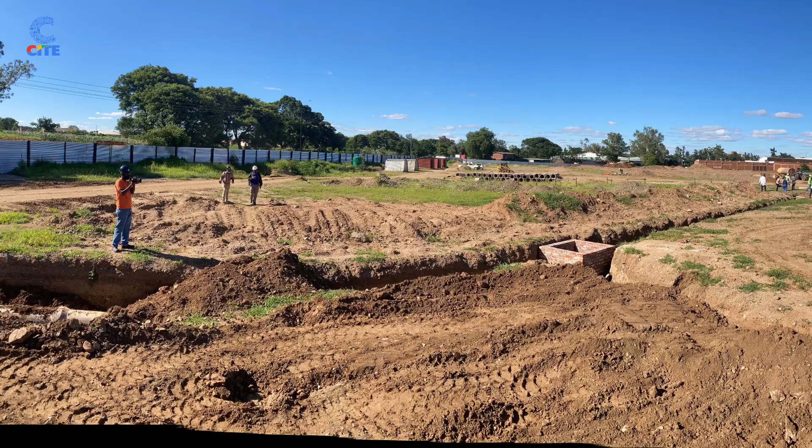Today we are here, this afternoon, ladies and gentlemen, to hear from the developer what is going on, and if ever you have got any questions that you need to ask, please do so. There is no bad question for as long as that question is necessary for the development of eGodini, and for as long as that question is in the interest of Bulawayo.

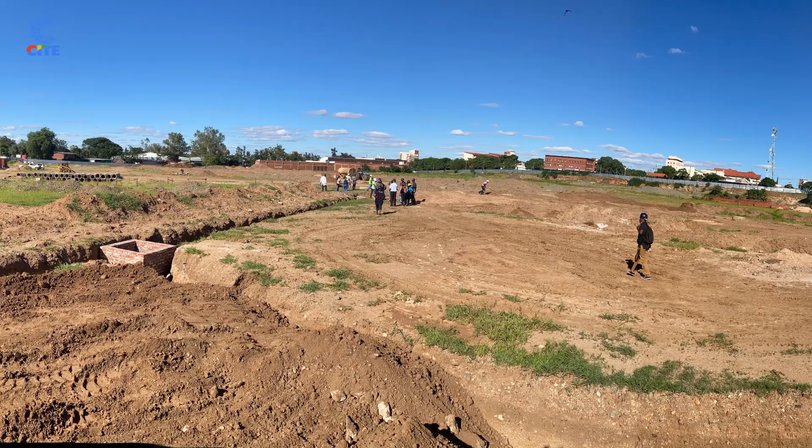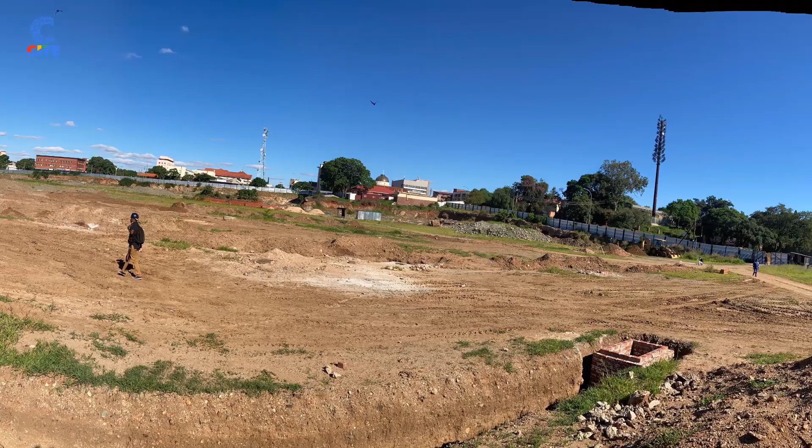Ladies and gentlemen, I want to say we have had some meetings, management and this morning council, to discuss the issue of eGodini. We could not invite all the major stakeholders for this meeting because it was going to be impossible. But with your invitation as media houses, it's just like we're inviting virtually everybody, because we are going to be able to tell a story.

Let's sit down now, listen to the presentation by the developer, and we'll have a plenary session and a talk, after which we expect you to project exactly what is happening on the ground. I thank you. Thank you very much for coming to the briefing session.

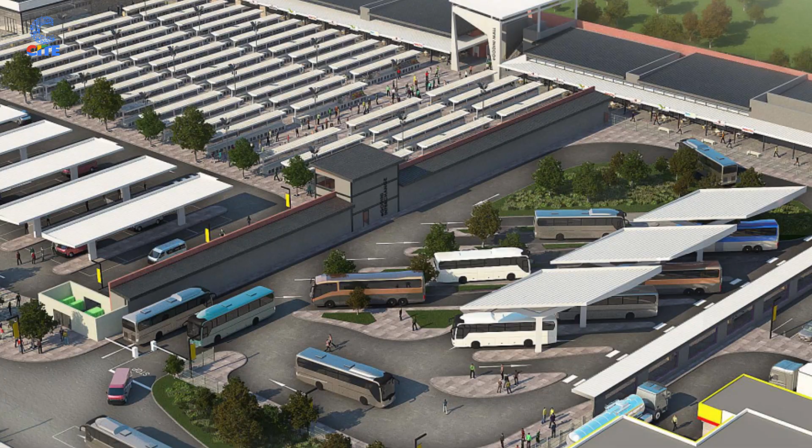What we will be doing today is giving you an update of the project. The way we are going to do it is, instead of it being just a briefing session, we're going to try to go into each section and give you a little bit of detail around that. Hopefully we won't take too long, but I think it's important to make sure that we are able to engage on that basis. So I will start just to give us all a quick recap on the project and what we are actually talking about.

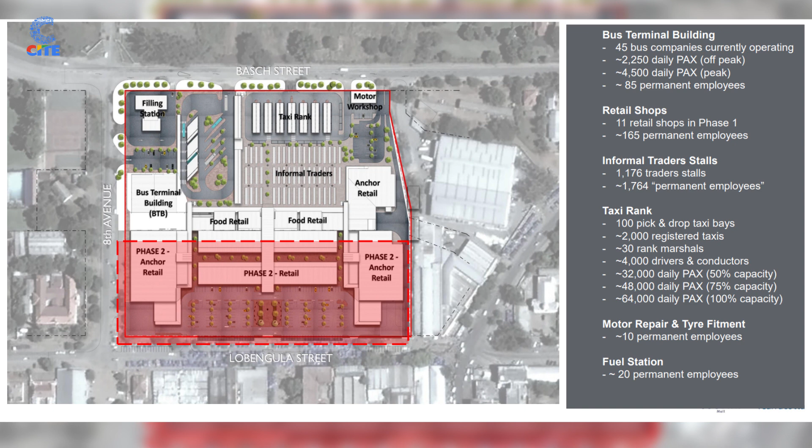If you recall, our development has got different phases, starting from phase 1, which is split into 2 phases, but we will deal with that. And then there is phase 2. So in phase 1, we've got a taxi rank, informal traders, a bus terminal building and its platform, fast food retail, and anchor retail. That is phase 1. Why is that phase 1?

It's phase 1 because it's informed by the market research that indicated that this is what will kickstart the project: start with these facilities, and then as time goes on, you add other facilities. Like with any development, it's a natural progression of a development cycle where you start at a certain point and you add as the environment grows.

If we talk about phase 1, we're still recapping here before we get into the meat, I indicated that there's a 1A and a 1B. Hopefully everyone at the back can see that. And then you will have your phase 2. So in your phase 1A, which is what we are here to discuss today, we've got informal traders, 1,176 stalls. We've got a taxi rank, a Zupco rank, motor retail, and ablutions. So that is the section that is phase 1A.

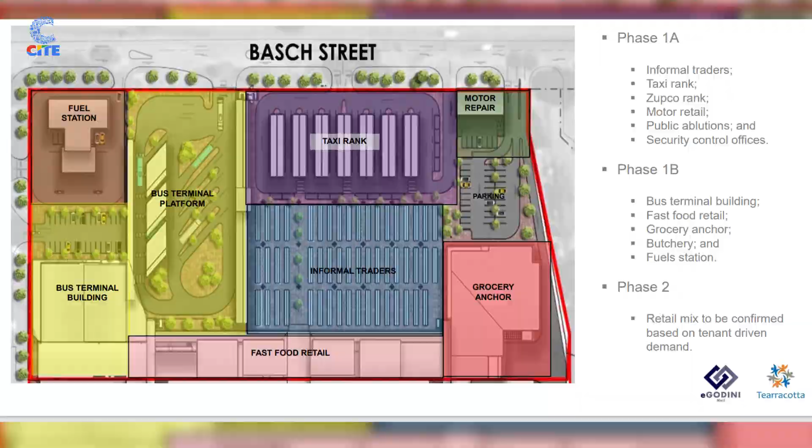So you will also see on site, the focus has really been on preparing to get us to be able to do the phase 1A area. This is phase 1, including 1B. In 1B, you will see the bus terminal building, which is over there, the fast food retail, which is over here, and then the grocery anchor, which is over there. So that is phase 1 in totality. Phase 1A will be the taxi rank, the informal traders, the platforms, and the ablutions and the offices here.

So how we're going to do it is that when we complete phase 1A, we then move our hoarding backwards to this section so that we can then work on phase 1B. Now also, we just want to be able to contextualize issues, this time in terms of the different stages of a development project. It's very important that we put it this way so that we can follow and understand better as we unpack the different areas.

So typically we will have 5 stages, 1 to 5: planning and approvals, what we call here the enabling works, then the civil works, then the top structures, so that's the brickwork, and then the commissioning. In your planning and approvals, your typical issues are your geotech, your topographical, your EIAs, and all your architectural and engineering designs and plans.

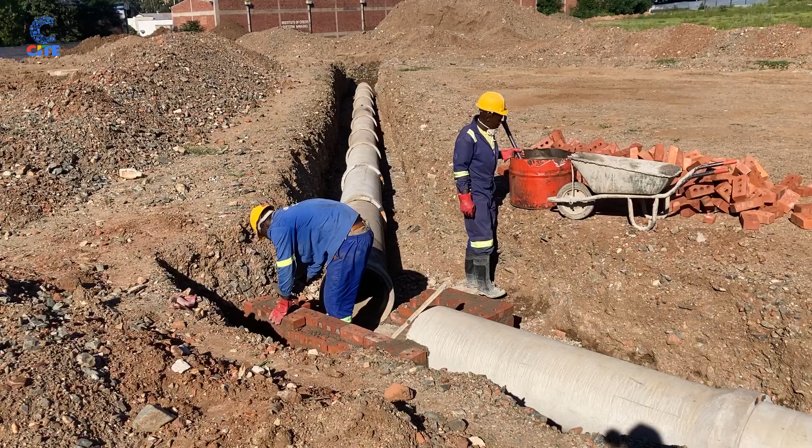And then top structures, that is the brick now coming out of the ground. That is what all our people are crying for, to say, when is the brick coming out of the ground? Because all these other things you are doing, we see it, it's fine, but when is the brick coming out of the ground? So that is what we will also look at in terms of phase 1A of the project that we are dealing with. Timing, where are we, what's actually happening. Then there's commissioning.

I think these phones are disturbing my...

There's commissioning there, number 5, and then that's where it is. Now, if you look at this column here in terms of weighting, it says there the weighting of each of these stages. The weighting varies depending on the specifics of the project. Like I said, if we are going to Rose Camp and we have to build a taxi rank at Rose Camp, it's already flat, we can get into it.

It's easy. But now let's talk about eGodini, phase 1A, the weightings, what was actually happening. For our phase 1A, planning is 10%, that's normal for most projects. Enabling works, because eGodini was not easy to do a development on, we had to do a lot of enabling works. You will see that as we take you through the presentation. What was actually done? What is the context and the extent of that? That you will then see. That comprises approximately 35% of phase 1A.

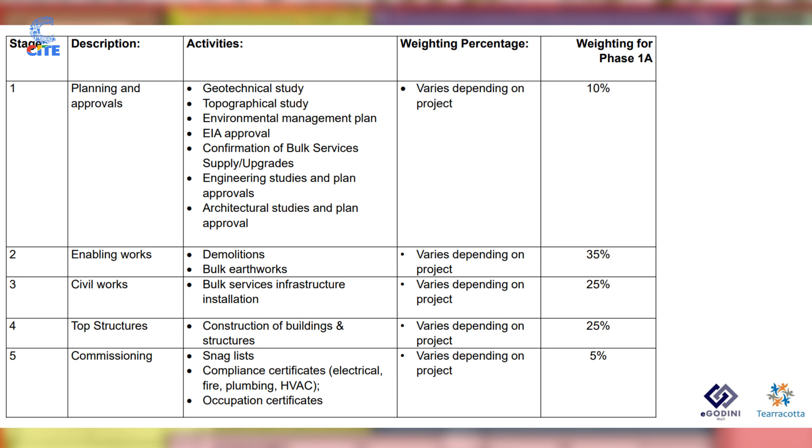When it comes to top structures, for us the taxi rank, the bus rank, the informal trader stores are simple, good structures, and because of that their weighting is about 25% of the project. Then commissioning is the last thing. In our project it is about 5%.

That deals with things like your compliance certificates, your electrical, fire, plumbing, and then eventually, once you have all your compliance certificates in the file, council can then issue an occupation certificate, which means that it is safe now for human beings to go and operate and use those facilities. So these are the stages.

So moving forward now, when we talk about what we have been doing on site, we're going to be talking about it in the context of these stages and the weighting of these stages in relation to phase 1A of the project. So if we start with phase 1A planning and approvals, the first item there, number 1, planning and approvals, we'll go through the descriptions and then we'll look at the status there. So planning and approvals, very simple exercise.

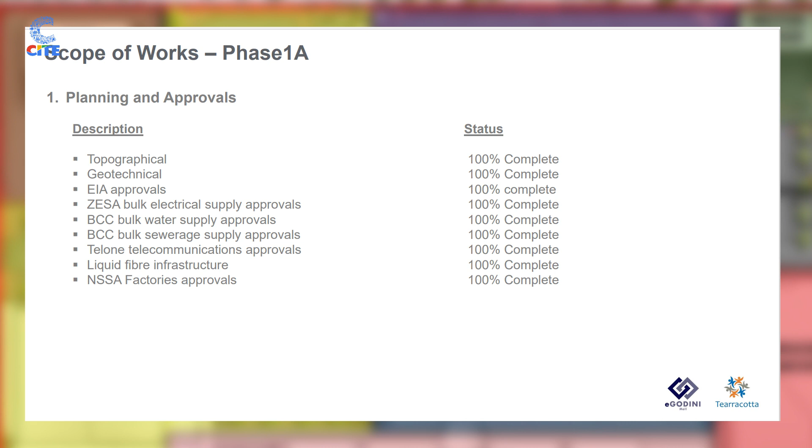Our topographical studies, our geotechnical studies, our EIA approvals, bulk electrical supply, bulk water supply, sewer, telecommunication and NSSA factories are very simple, straightforward. You prepare your documentation. We use a qualified, registered professional team, architects, engineers, all those different professionals. They did that, they submitted, got their approvals there. Those planning and approvals, let's look at the timelines there. It's important to have the timelines.

So we start with the first line item there. Council announces site handover to Terracotta. That was done in January 2018. After council announced that site handover, some of the stakeholders who were physically occupying the site, the informal traders and their taxi associations, indicated that they would like to have a meeting with council so that, from their perspective, they make sure that if they are being removed from eGodini, when eGodini is completed, it is them who will be returned to eGodini. It will not be a different group of people. So yes, this is what the stakeholders required.

There were also residents associations in those sessions. Another issue for residents associations, and for taxi and informal traders as well, was to say the work that is happening in eGodini, can it benefit residents of Bulawayo? The employment, can it benefit residents of Bulawayo? The companies that are working there, ideally, can those be companies that are based in Bulawayo, so that those companies employ people of Bulawayo? So that was another issue that the Residents Association, the Taxi Association and the Informal Trade Association raised. Okay, we engaged and then we agreed on that.

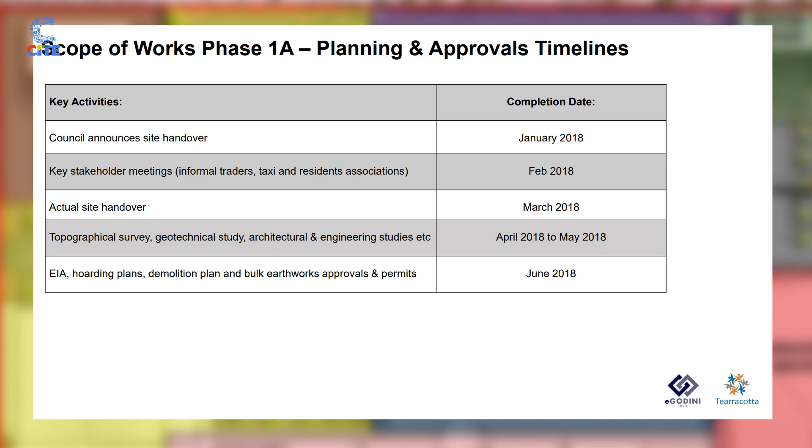In March 2018, as soon as we got site handover, our professional team, architects, engineers, the guys who were doing designs for the redevelopment, there were certain designs they could do before physically accessing the site. But to finish those designs, they had to physically access the site, and they were only able to do that in March 2018, because there were people occupying it. So they accessed the site, and then from April until May 2018, they finished all their designs, drawings, studies, reports, everything in order for us to submit and get approvals. Once that happened, we quickly did the relevant approvals for EIA, the demolition, bulk earthwork approval and permits. We did that in June 2018, and we got those permissions.

Now, who were these people who then were involved in planning and approvals? Because remember, we've said the resident association, they all said we want local companies, local people to be working. We said, okay, we've renovated the contact center as Terracotta, let's try to support what the stakeholders have told us.

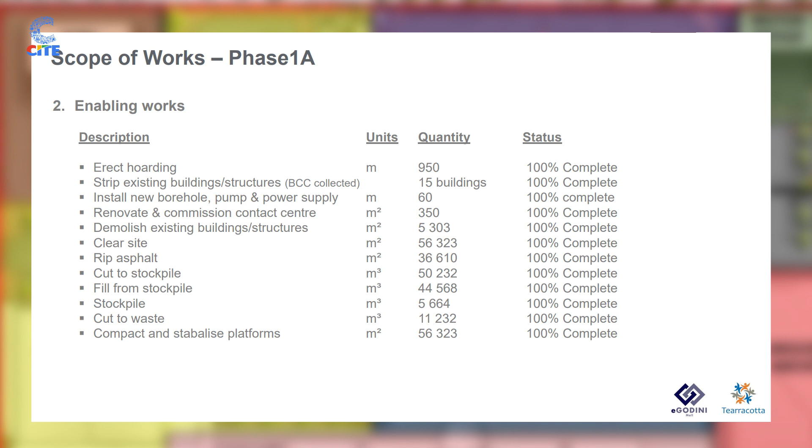And then from there, we have the contact center, which is this building here, 350 squares. Like I said to you, we renovated that, that's complete. And then we had to get in there and start doing the work. So the first thing we did, we demolished those existing buildings, about 5,000 square meters, that is complete. We had to clear the site. There were trees, there were top layers of the black cotton soils that we had to remove. You can't use that on a site, so those have to be dumped somewhere. So those go to Pelandaba, the municipal dumping sites, and that was used to fill.

So City Council will tell us, this soil, go and fill those borrow pits that have been left in different areas, because those are dangerous to animals roaming around, and even small children, when they go playing, they can fall into those things. So council would tell us, go and fill that hole, go and fill that hole. And that's what we would do there.

And then from there, we cleared the site. That's 56,000 square meters. We had to rip the old tar that was there, which was not in good condition, of no use anyway. That was another 36,000 square meters. And then we started now doing the big enabling works. So there was a mountain all on this side. And that mountain, if you stand where we are standing right here, if you go along Lobengula Street, I think that's probably about 200 and something meters.

If you go along down that way, then you will see that the mountain was all the way up to there. But today you see the mountain is gone from there going forward. So we had to cut that whole mountain, and then we had to go and fill eGodini so that we can have the platform. So we cut to stockpile 50,000 cubic meters. We filled from stockpile 44,000 cubic meters, and then we've got a small stockpile left, 5,600 cubic meters of certain material that we wanted to keep.

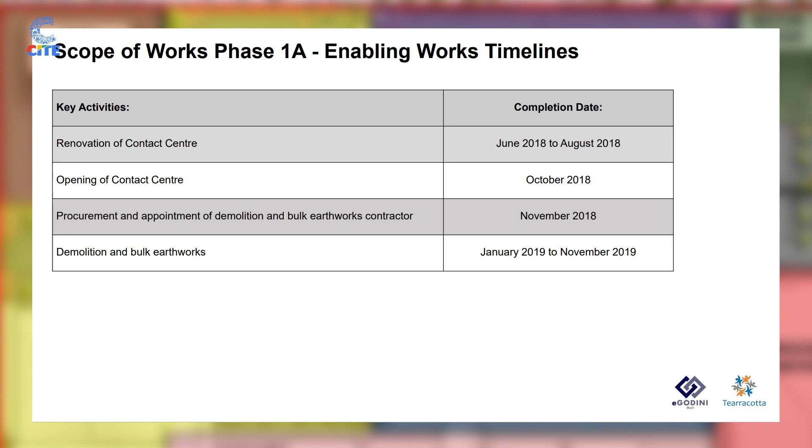What are these enabling works? Because also, what happened is that we see comments on social media where some people say no work has ever been done at eGodini. So we are saying, remember, when you talk about a development project, there are different stages. There's stage 1 to 5. So stage 1 was done. Now here's stage 2, enabling works.

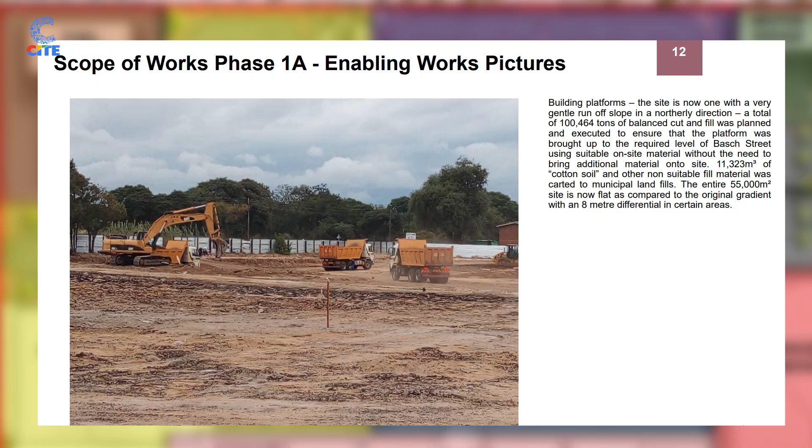And this is the civil contractor on site at the time. I'm always proud to show this picture because you'll see there's an excavator there, 330D Caterpillar, huge excavator. That is a mining machine. Normal construction machines would not be able to do the work that we did here during the time frame. They would still be doing civil works right now.

But because we're using Jared Goddard, because they do contract mining, they have the right size and the right type of equipment, and they have the technical expertise of handling huge tonnages of material. Remember I said it was 50,000 cubic meters of material that they were actually handling. I would just like to play something for you so that you can see during enabling works what was actually happening, the type of equipment that we were actually using.

And I always say, there's my excavator there, the large excavator. I always say to the town clerk, any day, if in any way in Bulawayo this excavator should work, please call me so I can come and take a picture, because I want to see a project in Bulawayo with that type. So it's one of the jokes that we sometimes have, but this is the type of equipment that we needed in order to do this type of work.

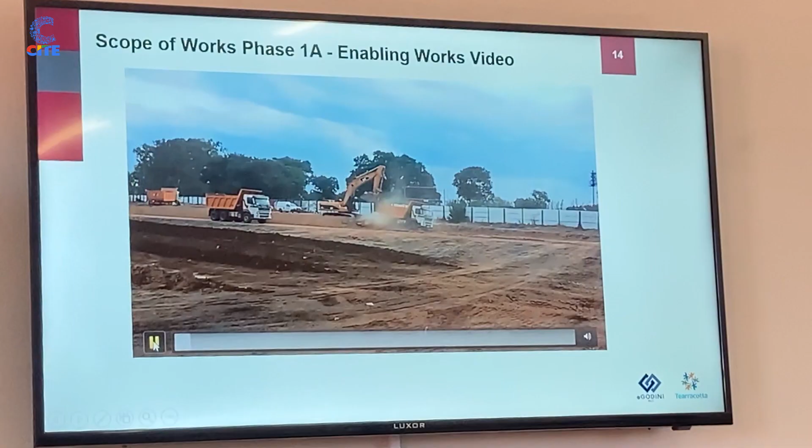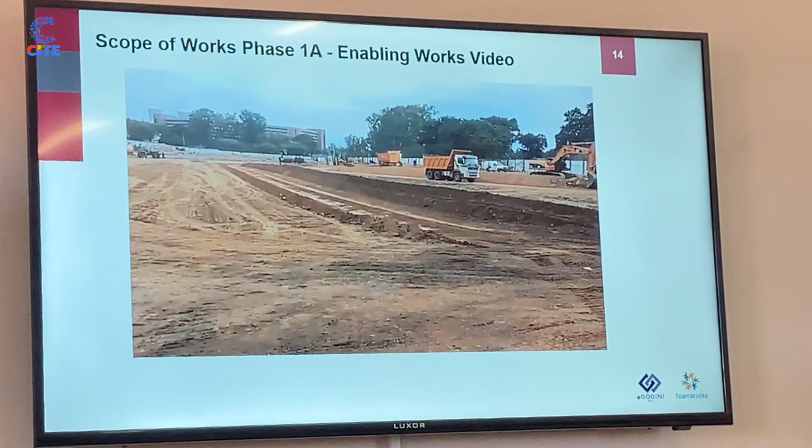Trucks. There we are. Loading 3 trucks at a time. Grader is mixing in situ material with new material on top. This is where we're dumping to fill in. It looks like we have got sufficient material on site to do all the infill, and that we will need to bring nothing on site. But the loader over there is also loading trucks, 2 trucks.

Now, when we talk about enabling works, you know, there's a beautiful joke that goes around where people say, these guys at eGodini, they are moving sand from left, they put it right. Then they take it from right, they put it in the corner. Then they take from the corner, they put it over there. What we are doing when we are doing that, we are actually doing civil engineering.

And it's very, very important because we've disturbed the entire ground here. We do not want to build things on top, the ground shifts, and then you have things that start to crack. So it's very important that we build the platforms correctly, we compact those platforms correctly, we allow those platforms to rest and to settle and to shift down correctly so that we can get the same compaction in the platforms that we build as what Mother Nature gives naturally in platforms that have been developed over billions of years, so you can just come and build a building on top.

It's a normal process. It's just time consuming. Yes, when you just look at it, it looks like Labantu, they're just pushing sand all over the place. But it's actual real work, it's real engineering work that is being done. And you can see it there, being explained on that video.

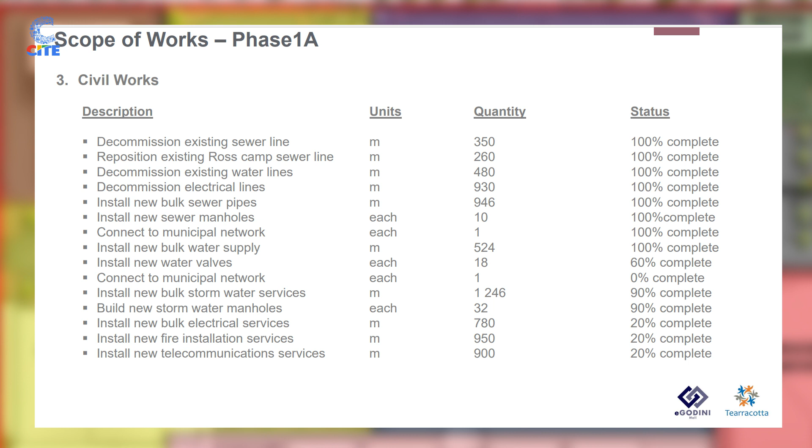We connected that sewer to the municipal line. We will show you a municipal line where we connected the sewer. It's flowing, the sewer that's coming from Ross camp, Ntlandlela. We've diverted, we've connected that. We had to install new bulk water supply, 524 meters. Install new water valves. Here they are, 18.

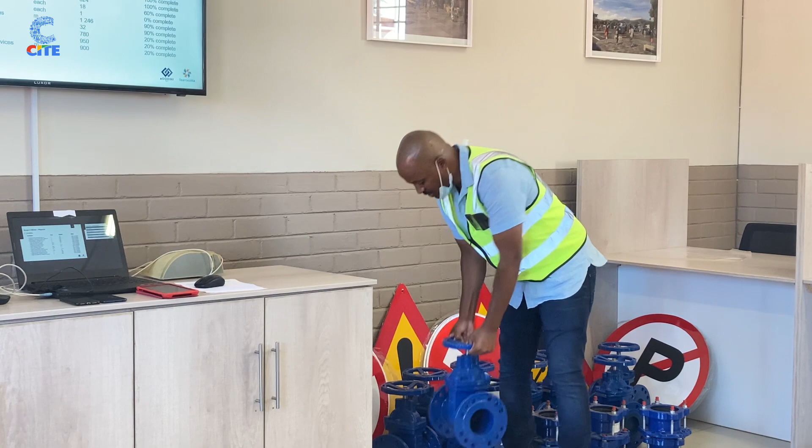We always joke with these ones here for phase 1B. We always joke with some of our council colleagues in the technical team to say, guys, can you see we are using the real stuff here? So just go and look at your own installation, because we want to put proper equipment for water inspection within eGodini. So we are trying to do this thing to the real standards. We're not doing something which is substandard.

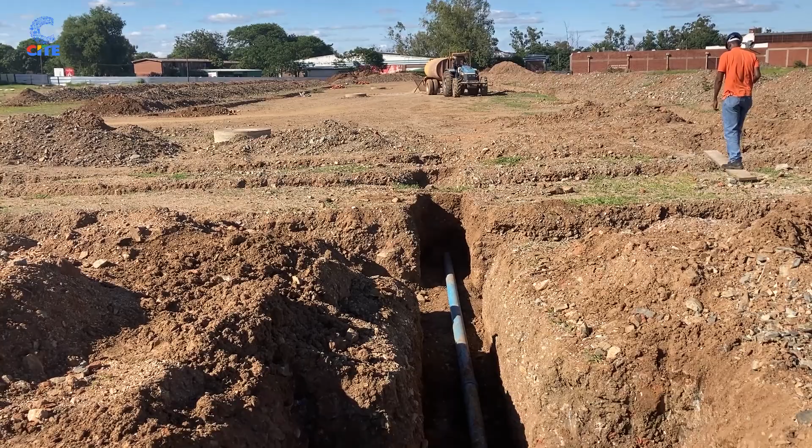We connect to the water supply. That's one. That's zero complete. We're waiting for a water meter. When we start our tour, we will show you where we started, because the water meter is supposed to be right outside here. Install new bulk stormwater services, 1,246 meters, 1.2 kilometers of underground bulk.

Now, the reason why we want this to be done, remember I've said there's 1,000 informal traders which are there. Imagine there's a sudden rain and it's heavy rain. You want that place to drain very quickly so that informal traders, public transport users, they're not affected by that thing. That is why we could never have used the infrastructure that was already there. It was just not up to the standard that we wanted for this redevelopment.

But of course, this is 2020. Those things maybe were built in the 50s or 40s or 60s. So it was very good then, but times have moved now. So you'll see where we are in terms of our stages of completion, and then our electrical supply and fire, those are still at 20 for phase 1A. The reason why those are 20 is because once you're finalizing your top structures, you build them in, then you put them around on the periphery. So that's the programming of that.

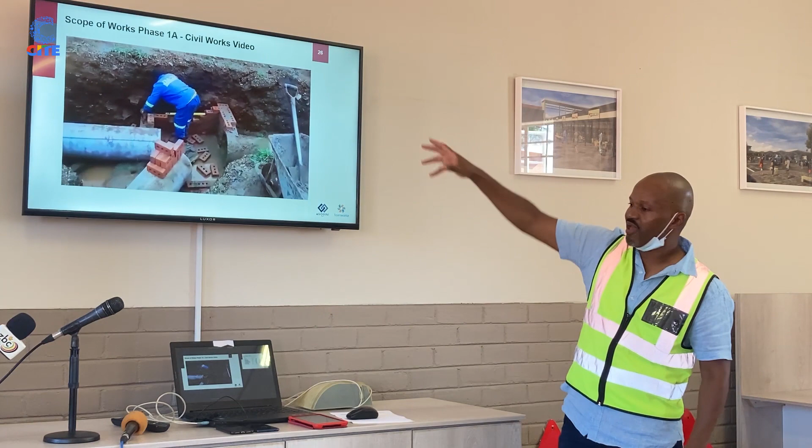Okay, there's a different area. This one was very important because this was during the construction industry break. It's raining. Construction industry closed in the whole country. Our guys are working on site. You will also see they dump the pipes there. There are some concrete pipes over there on the back. So everywhere they're supposed to work, they go dump the concrete pipes, doing that.

And it's very easy to understand when somebody says there's nothing there. Because these guys are working in trenches. When you're standing on the fence, you won't see them standing in a trench. But if you go inside, you then see that particular one. And you can see the red ground is still wet and whatever, but our guys are actually still working.

Right. So that was civil works, what we are calling here the installation of bulk services. So the construction underground. We are then saying, look, this work took us a long time. It took us much longer than we wanted, but there's nothing we can do because this work has to be done correctly. It has to be. This work has to actually be done correctly. So let's be able to do that.

The fortunate thing is that during that construction industry break, we were able to try to catch up on the time that we lost. But of course we failed to catch up on all the time, but we tried to catch up to say, okay, we want to complete now, so that from now we can do the overground construction, because the underground is then done.

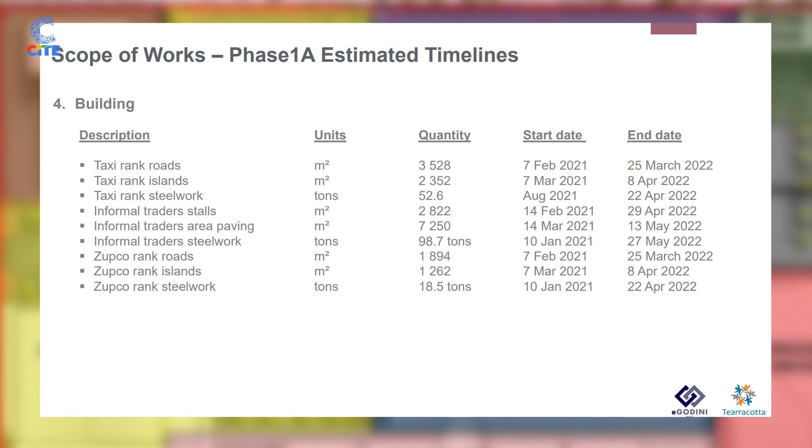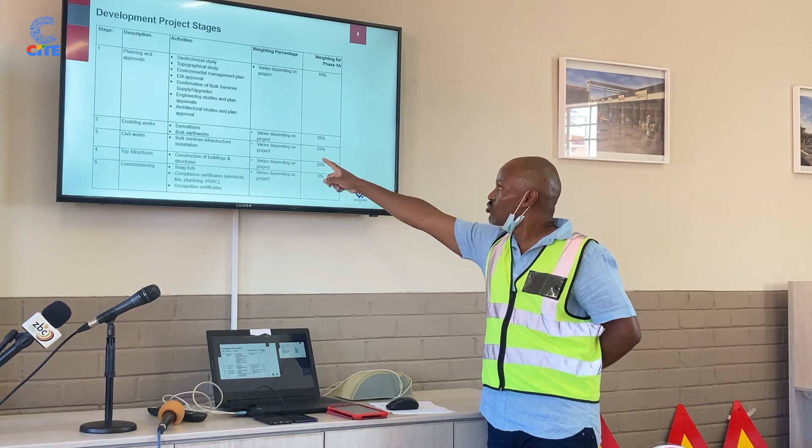If somebody else was building something else for him, it might be 50% or 60%. It just depends on the type of project. But because it's in a phase 1A, bulk earthworks and civil works was such a huge component. So you can see where we are, much better. End of this month, I'm on civil works. It means in terms of phase 1A, we're at 10 plus 35, that's 45, plus 25. How much is that? We are 70% for phase 1A. That's where we actually are now.

We were meant to have finished, but we were unable to do that for the various reasons that I've explained. But we are moving progressively there. Could it have been faster? Yes, it could have been faster. Was it an absolute disaster? No, we don't think it was an absolute disaster, but we keep moving in terms of that. Right.

So, how do people get to do work at eGodini? The way they get to do work here is the way that the community said they must do work. So you have to first come and register at the business center in the database. Whenever there's a work package coming and we need to procure something or appoint a contractor, we only ever do it through the business center, the database. So if we want reinforcing steel, we go into the database: who are the suppliers of reinforcing steel? We pull out those people, and the request for quotation is only sent to those people registered on the database. So that is how we do it.